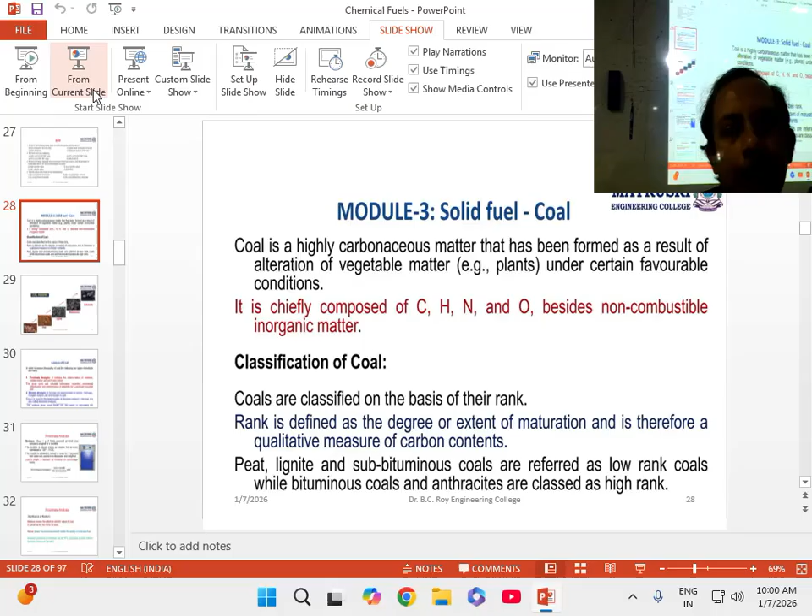Today we'll talk about the solid fuel coal. Coal is also one of the fossil fuels, and we Indians are mostly dependent on this because our thermal production units totally run on coal. Just 2 years back the data was 80% dependence on coal, and now we are dependent only 50-52%. So that means we have progressed a lot in last 2 years.

Alternative energy resources are coming into the market, and everywhere the government is giving subsidy so that solar panels can be installed in every household. Do you know that for every kilowatt of solar panel you put on your rooftop, you get 18,000 subsidy from the government? There is a program already going on, and everyone can utilize this facility. You have to register, implement, and you will get 18,000 subsidy per kilowatt.

This depends on the size of your house. I have applied for our building rooftop. If you apply for 1 kilowatt, it will be 18,000. If you go for 10 kilowatt, I can tell you the data, because 10 kilowatt costs 5 lakh, and government is giving 1,80,000, because it's 18,000 per kilowatt. So the rest, 3,20,000, we have to spend ourselves. That's how the system is there.

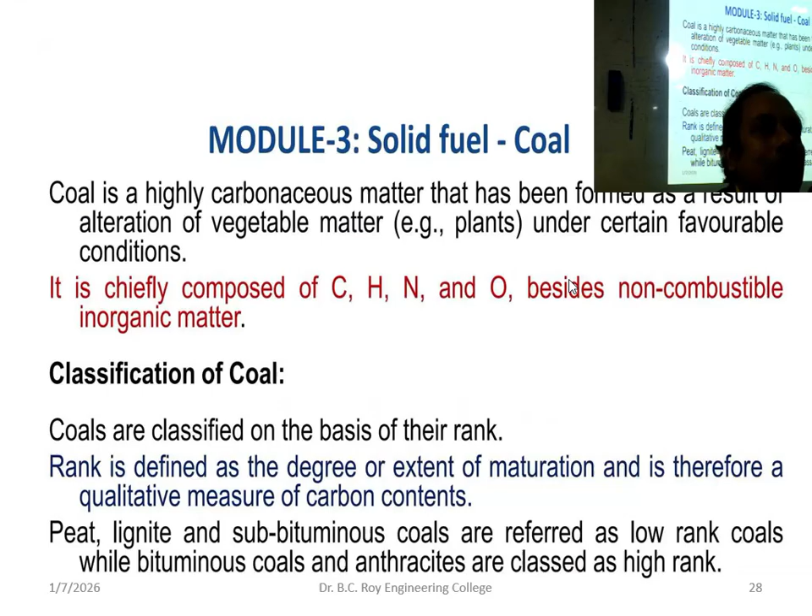Rather, if you mix it, the percentage goes down. There is some level below which the sulfur content is suitable, no problem. Suppose below 3% is suitable - you have to bring it from 5% to 3%. So very low sulfur coal and high sulfur coal, if you blend together, you get below 3%. That is the way people are doing it.

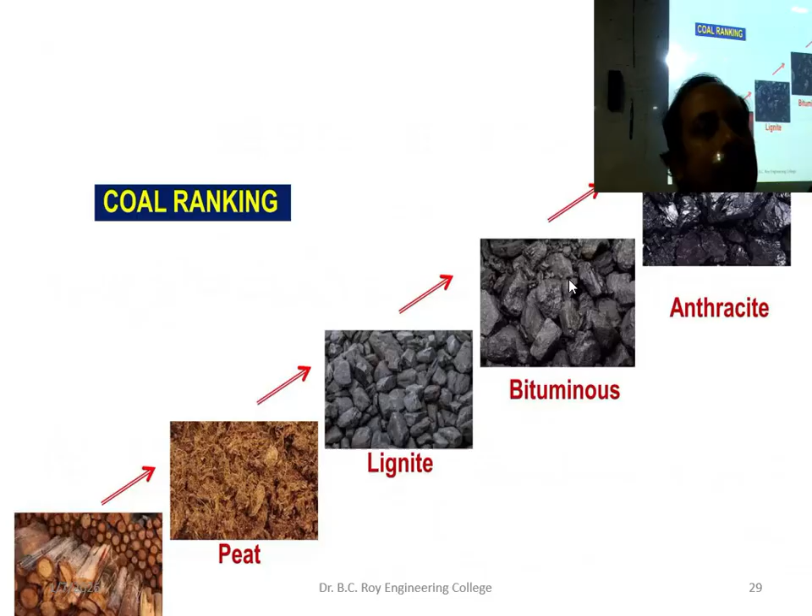So this is ranking - peat, lignite, bituminous, anthracite - different ranges of coal are there. Going upward, going higher means quality is better - better in the sense calorific value is high. That is the main thing, because from coal what do we expect? Only calorie. So calorific value is high, that's why we call it better ranking, higher ranking.

Then coming to analysis, specifically analysis of coal. What is analysis of coal?

There are two types of analysis: proximate and ultimate analysis. Proximate means close, closeness - so proximate analysis means close analysis. What is the meaning of close analysis? We get certain parameters. One is moisture content - how much water content is in the coal, whether it is dry or wet. That is called moisture content, one of the parameters we get from proximate analysis. Second parameter is volatile organic compound content - how much volatile matter content. Volatile matter means a lot of things, like phosphorus - it is volatile. If you apply heat, phosphorus will become what?

P2O5 will burn. Phosphorus will burn and produce certain gas. At high temperature, this P2O5 is gas, so it goes out. Sulfur will form sulfur dioxide gas, it also goes out. So these are all volatile - not generally volatile, but when you apply heat, it becomes volatile.

And the coal becomes porous, because inside it different compounds or minerals are trapped. When you apply heat, these are burnt, forming gas and going out. When it goes out from the coal, it becomes porous because it gets filled up by air - it cannot be empty or vacuum. So air seeps in, and you get this porous texture of the coal.

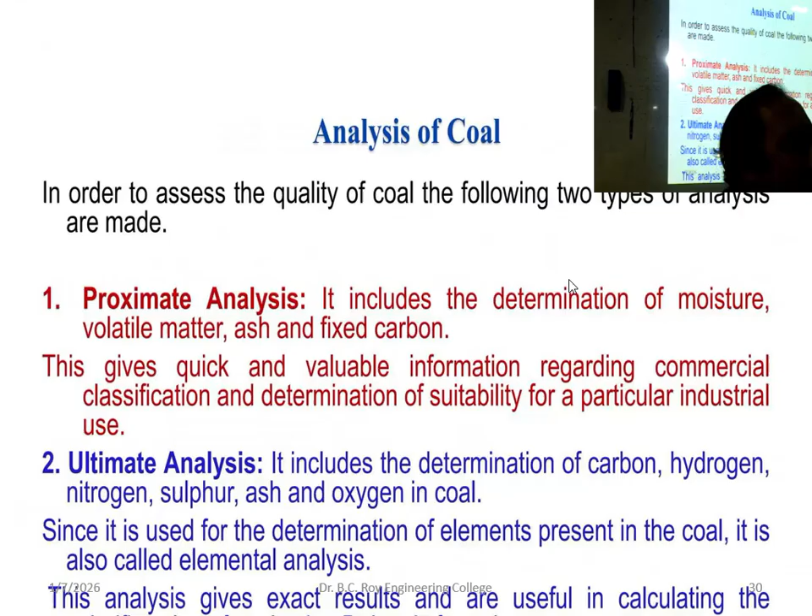So this type of analysis is called ultimate analysis - how much carbon percentage, how much hydrogen percentage. If you analyze actually by some method, that is called ultimate analysis.

Now let's go to proximate analysis in detail. Some brief overview I told you, so you have to get some summary, otherwise you don't understand what you are doing. Now this proximate analysis, let's go ahead.

We have in the lab also an oven like this, but this muffle furnace is something different. Looking like this, inside there is a small chamber and temperature goes very high - that is the main function. Hot air oven temperature hardly goes 200, 300, 400, not more than that. That is called hot air oven, used for drying glass apparatus.

Maybe you have seen it in our lab, there is a hot air oven, the chamber just looking like this. There you just keep the wet glass apparatus and it gets dried up. After half an hour if you take out you will find it dry. So for drying purpose we are using it, okay, that is hot air oven.

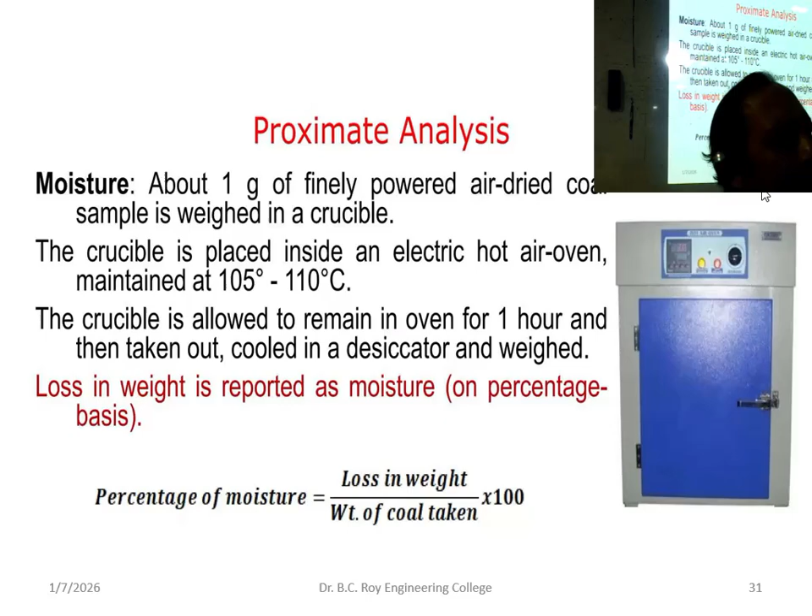So let's finish this proximate analysis. What is the significance of moisture? Significance means benefit or problem. If you have a high moisture content, is it good or bad? It is bad because it will reduce the calorific value. Moisture means water, as it goes out it will collect the latent heat, so your calorific value will go down.

That's why in the rainy season we are spending more coal and more money to get the same amount of electricity. The electric supply company takes the bill equally throughout the season, but maybe they get more benefit in winter compared to the rainy season. In the rainy season they get less profit. So throughout the year they take the same value, so it gets managed.

So what is happening? If the coal is comparatively wet, more coal you have to burn to get the same amount of energy. Quite obvious, because it is collecting the latent heat and getting evaporated out. More and more heat is lost, wasted, because it is utilized to produce steam out of moisture. So it is not good.

If it is totally dry, is it good? No, then also there is a problem. If it is totally dry, it will produce too much fly ash. It will fly up and people nearby will be affected, health will be affected, it will get into the nose as dust. That dust is not ordinary, it is fly ash coming out from the chimney. So it is very bad for health, it will give different types of breathing trouble.

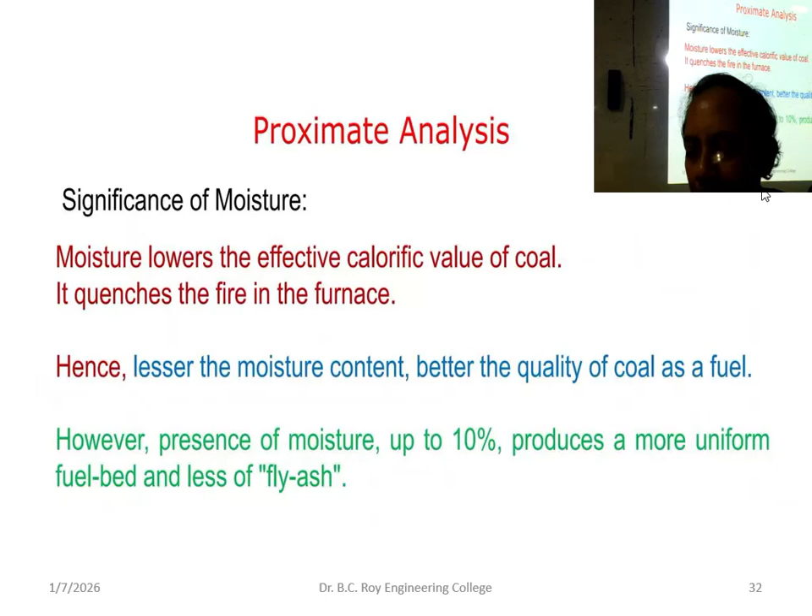The same crucible, if you continue using it, it will be convenient for us. Just take a weight and put it into the furnace again, just increase the temperature, and it will be very easy. But there is another type of container available particularly for this purpose, volatile matter content, called the VM crucible. That is a separate crucible with a different design. For other purposes, the crucible is like a small pot, bati type.

But for this volatile matter, it is a cylindrical one, with a lid and a small mouth, so that air cannot penetrate and it will not burn. Otherwise coal can burn in presence of oxygen. So distillation is always done in absence of air or with very limited air. Instead of that open pot, you take a closed container, which can be nickel or porcelain, but with a lid so air cannot go in and burn the coal. At least to some extent you are controlling it.

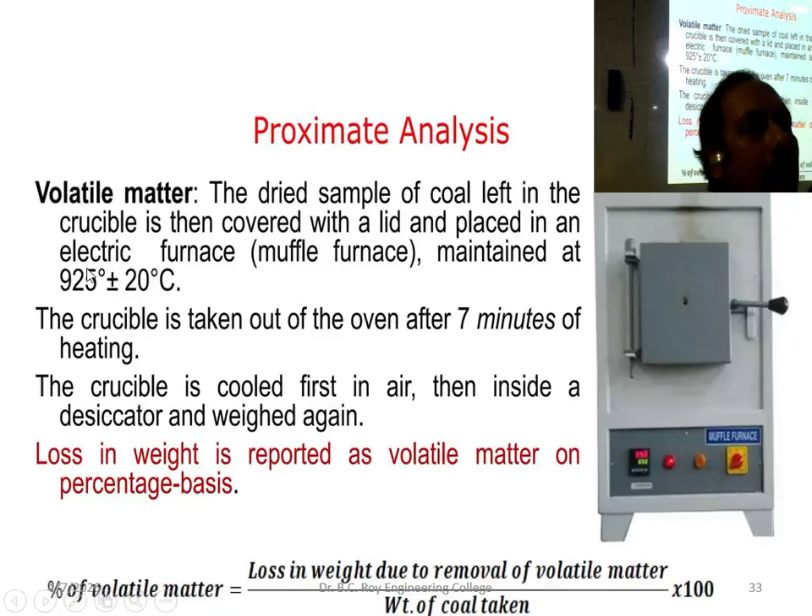After that, again there is a weight loss, which you have to measure. From the weight loss you get the percentage of volatile matter content in the coal. If you want to analyze the quality, how much volatile matter there is, this is the way. High volatile matter is good for making coal gas, but not good for furnace. Low volatile matter is good for furnace. That is the significance of this analysis.

Sometimes this volatile matter may contribute to calorific value, but it's difficult to control, that's why we normally avoid it. Also, if the flame comes out of the furnace, it is hazardous - people in the surrounding cannot stay to do their job because flame is quite dangerous. That's why it should always be contained inside the furnace. So high volatile matter content is not good. But we cannot make things completely sealed either, since you have to supply air.

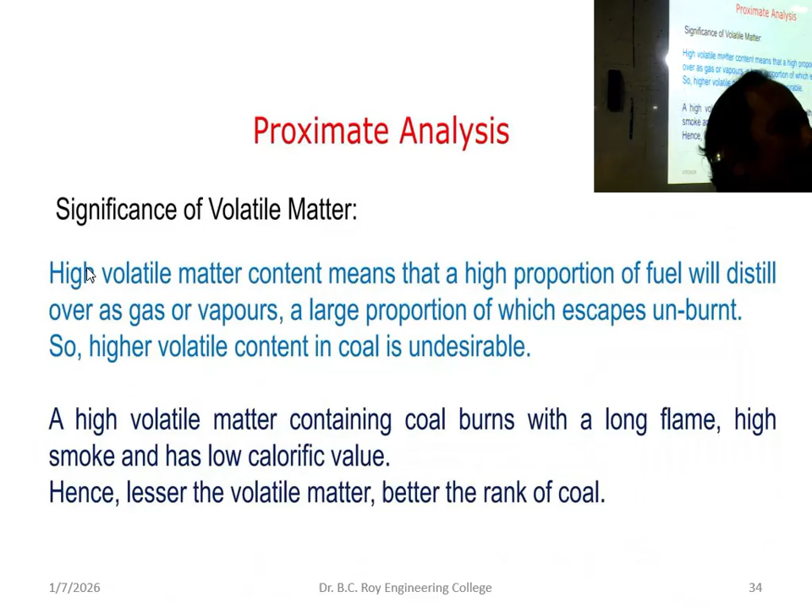Next, the third parameter is ash content. How to measure it? Same furnace setup, but kept for half an hour at 700 degrees centigrade - comparatively less temperature than before, which was 925. Now it's 700, but the time is more. That means you are doing complete burning to get the ash content.

Percentage of ash is the weight of ash left divided by the weight of coal taken, multiplied by 100. That gives the percentage of ash content. High ash content is not good, as already discussed, but one thing I haven't told you yet - at high temperature, ash can melt.

If it melts, there are always cuts and cracks in the furnace, because you are continuously using it for a long period with continuous heating. There will be cracks in the wall of the furnace. The ash can melt, flow, and go inside those cracks, filling up the gaps. The problem is two different materials in the same place - one is the ash material, the other is the actual refractory material the furnace is made of. Now there are cracks inside, and the molten ash flows inside. Then you have two different materials, and the thermal expansion coefficient of two different materials will be different. This creates a lot of stress and the furnace will crack, even burst. So the life of the furnace will be reduced.

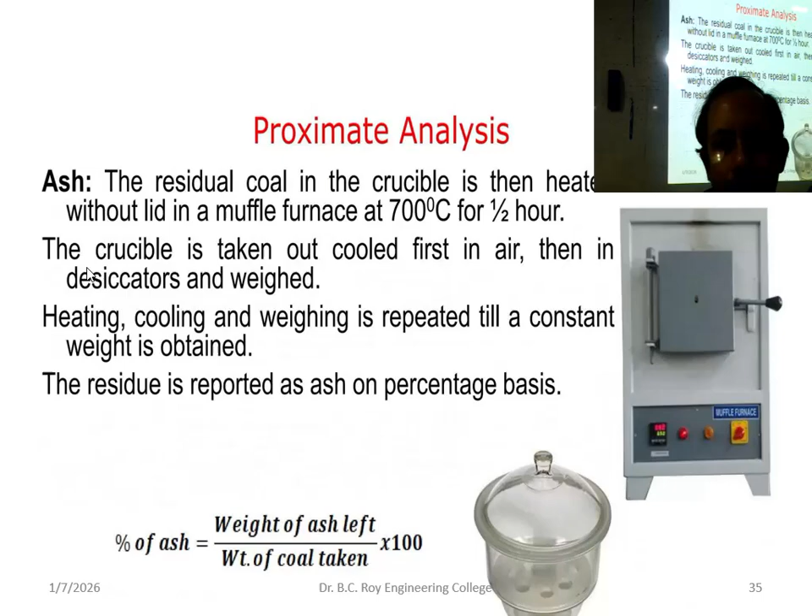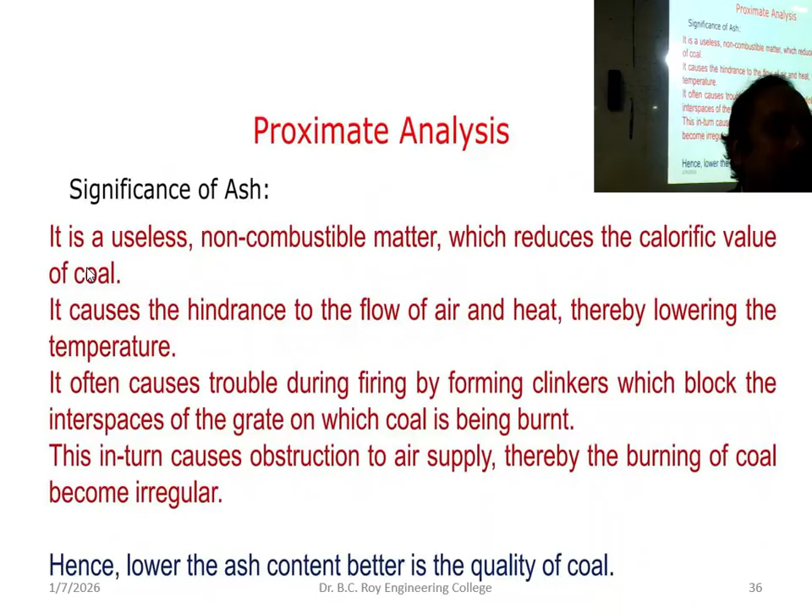So these two things - ash is reducing calorific value content, and you're spending more money for transportation cost because you're carrying the coal along with the ash. So you are actually spending more money for less amount of energy, and the cost of everything will rise. And another problem, molten ash can damage the furnace.

These two things relate to proximate analysis. Fixed carbon content is always good because fixed carbon is what we actually need. Carbon content should be good - high carbon content means good calorific value, high calorific value, so it is better. So these are the parameters under proximate analysis: moisture content, volatile matter, ash content, and fixed carbon - these four things.

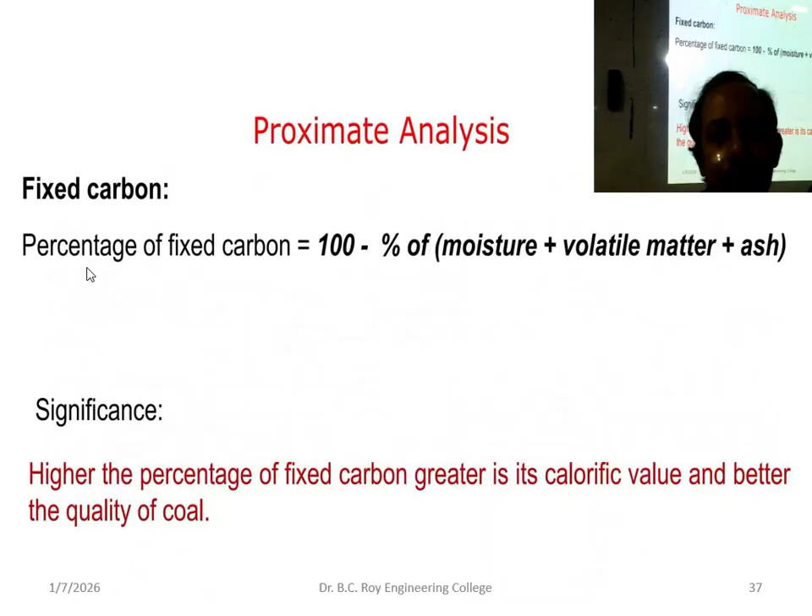I think this has been discussed enough, so I'll skip this video. There is a video actually showing this, but I've already vividly discussed how it is done, so no further explanation is required. So to save time I skipped it.

Now ultimate analysis, also called elemental analysis, where we analyze the different elements. Have you heard about the Liebig method? This organic compound analysis is taught in 11th, 12th standard. It's a method used for analyzing carbon and hydrogen content. Here you have a sample, maybe coal or any organic compound, and you want to analyze its carbon and hydrogen percentage.

So there is a long hard glass tube, which can be made to order at a glass factory, and these are available. Now there is pure dry oxygen gas going inside.

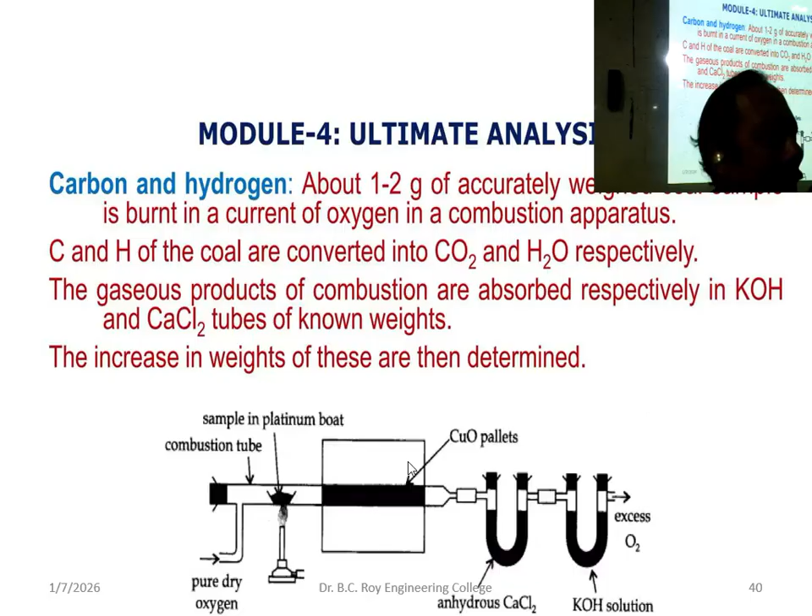Achha, why platinum? You can use it a very long time. Once you make it, it is a very inert one, and you can use it very long time. That is the benefit, advantage. But cost is very high. Platinum is more than gold, more than gold.

Okay, so combustion of carbon giving you carbon dioxide, and hydrogen is giving you water. So C and H percentage you get from here. Percentage of carbon you are getting into 12 by 44, as I told you, and for percentage of hydrogen into 2 divided by 18, and you are getting percentage. This is called Liebig method. Okay, only for carbon and hydrogen this method is applied. We have others also - this is the first step, percentage of carbon and hydrogen.

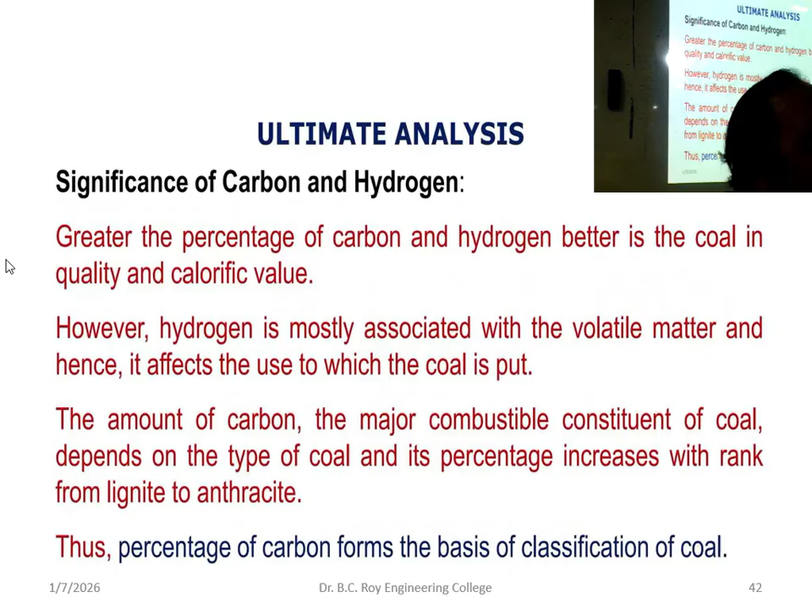Yes. Next, continue with the ultimate analysis. Next one is nitrogen. This parameter is nitrogen parameter. I already told you carbon, hydrogen, nitrogen, and sulfur - these 4 parameters. Now this one is nitrogen.

Achha, why round bottom is always preferred? Round bottom is preferred - cannot... uniform heat, no, heat will be uniform. For round bottom only you get the uniform heating.

That's why. So RB, there is a problem also - you cannot keep RB alone. Round bottom you cannot just keep here and there, because the bottom is round, so you cannot keep on some flat surface. Always you have to have some stand, something where you can keep it. That is the disadvantage. But still people are using it because this heating will be very much uniform throughout. Any other thing you take, you don't get that much uniformity. That's why RB is preferred.

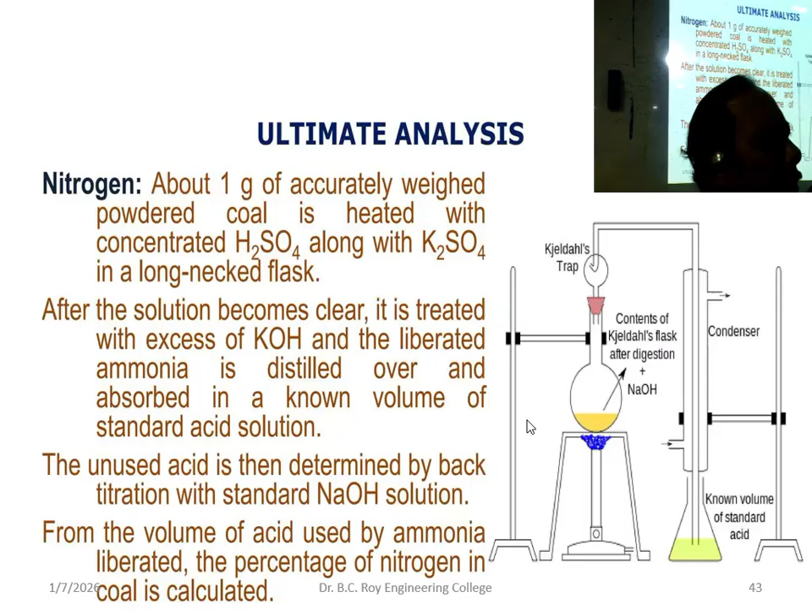So while taking the weight, that will make weighing difficult, no? That's why it is not made very rigid. So around 1 gram will do, or whatever you are taking at the denominator. So it is calculated with respect to that. No problem, exact amount is not required. There is no error that way. If you take 1.1 gram, if you take 0.97 gram, no problem, you're not getting error that way.

So this is the calculation.

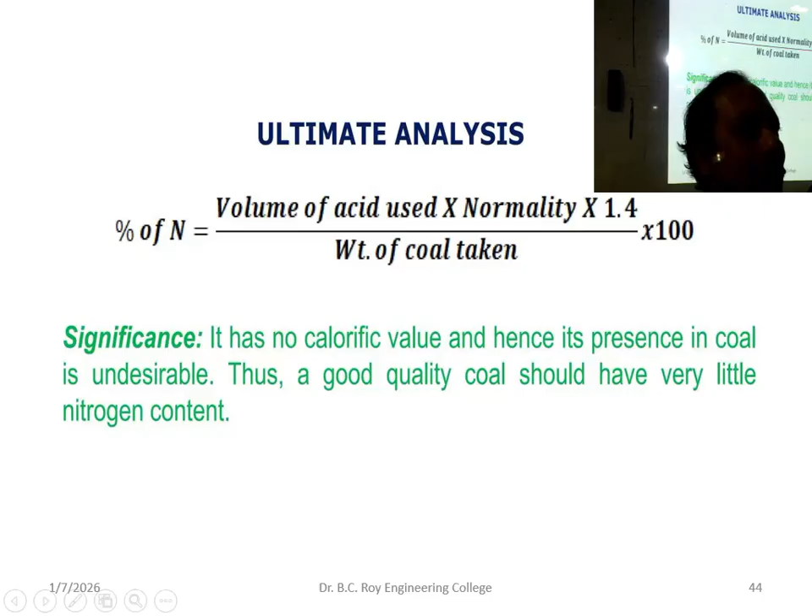Now next, in ultimate analysis, another parameter left is sulfur, and we end there, go for the EVS class. So this ultimate analysis, sulfur analysis, what we are doing, it is done in some chamber which is called the Bomb calorimeter.

And this sulfur is converted to sulfate. It is determined from the washing obtained from the known mass of coal used in the Bomb calorimeter for determination of calorific value. That means, in the Bomb calorimeter, calorific value is measured. During that, the washing that is made contains sulfur, so that sulfur is converted to sulfate.

Sulfur, because you are heating, burning. How do you get calorific value? By burning only. So from that Bomb calorimeter washing that we get, the practical experiment is done. In the Bomb calorimeter, what we do is measure the calorific value. So during that measurement, any sulfur present in the coal gets converted to sulfate, because sulfur will be burned into SO2. SO2 plus oxygen gives SO3, plus water giving H2SO4, and that sulfate will always be formed.

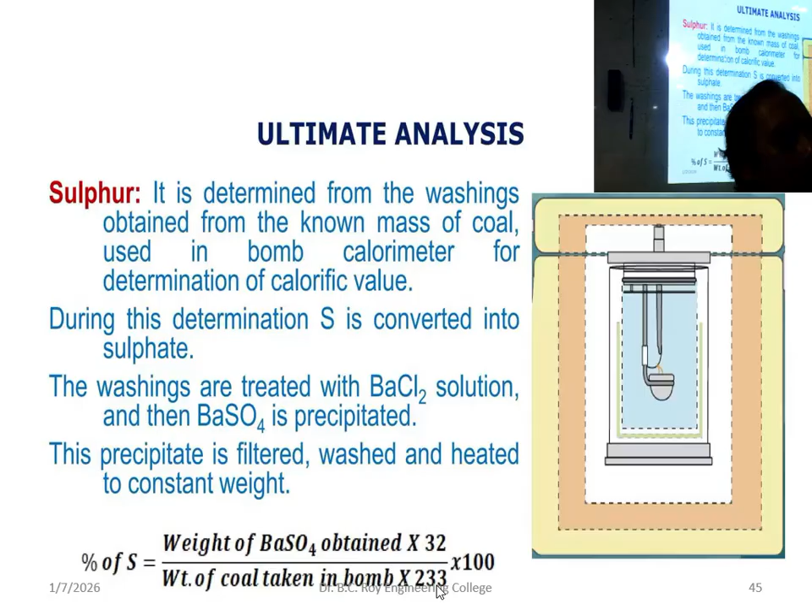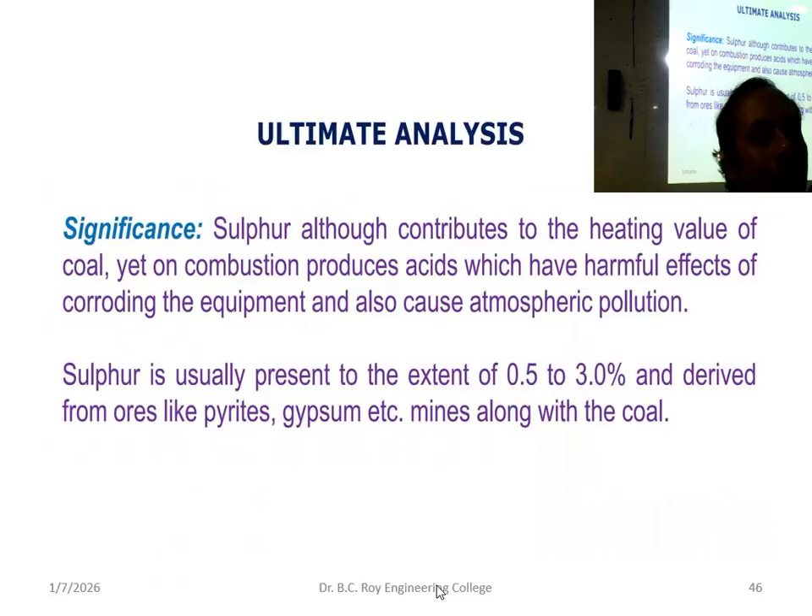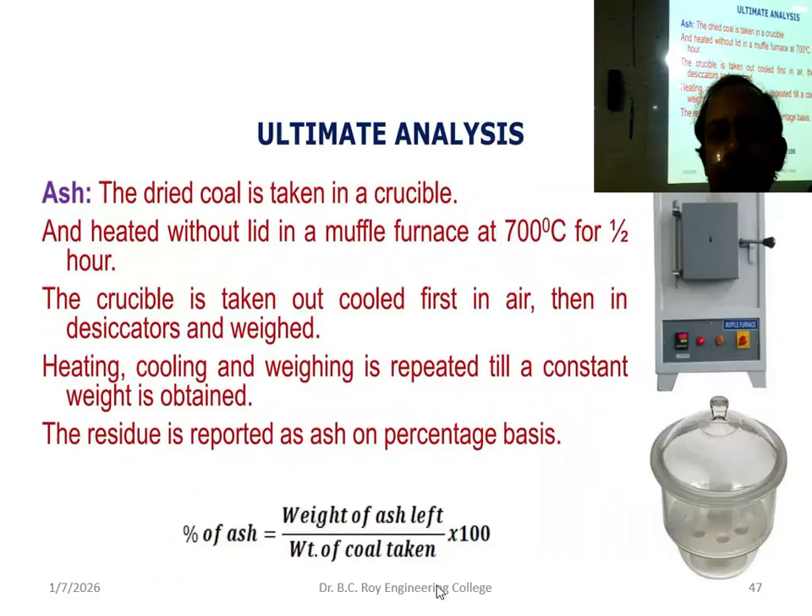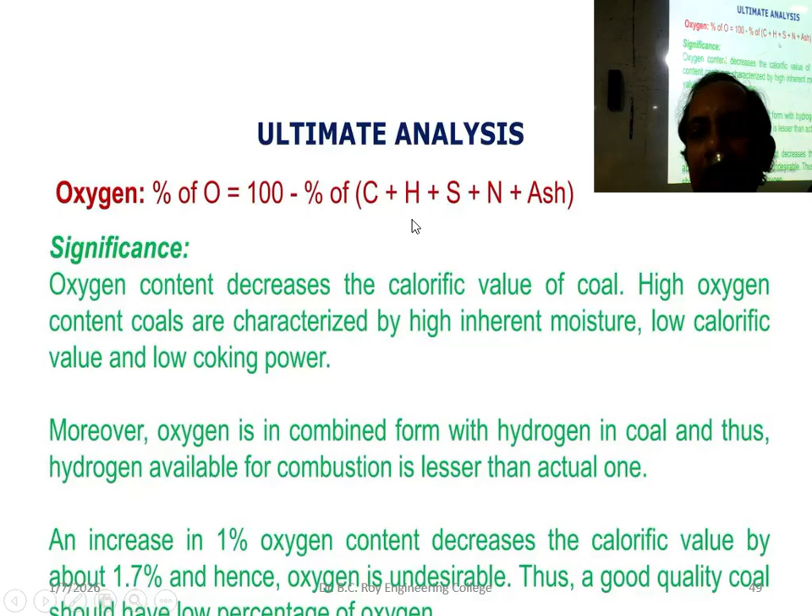Sulfur content high is bad for health. That's why though it gives some calorific value, we are not considering it beneficial - rather low sulfur is always considered better. Ash content, I have already discussed what ash content is, and in ultimate analysis also, sometimes ash content is analyzed. So percentage of oxygen - finally, 100 minus percentage of all the other things gives you the oxygen percentage. Okay, so I stop here for today and we'll go for the next chapter.